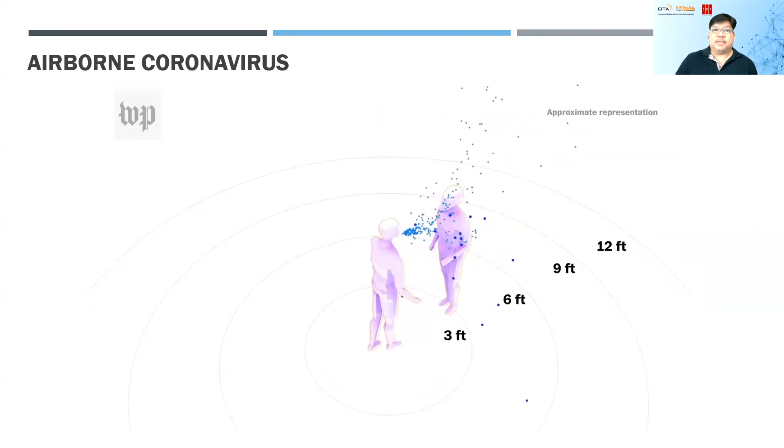A few months ago, the WHO declared the coronavirus as being airborne for a few hours. It can linger in the air for longer than expected times, probably around 6 to 12 to even 24 hours. That means infected persons, even just speaking, can aerosolize the air with coronavirus projectiles. So you can see people just speaking, singing, or coughing — singing aloud may really amplify the projectiles in the air.

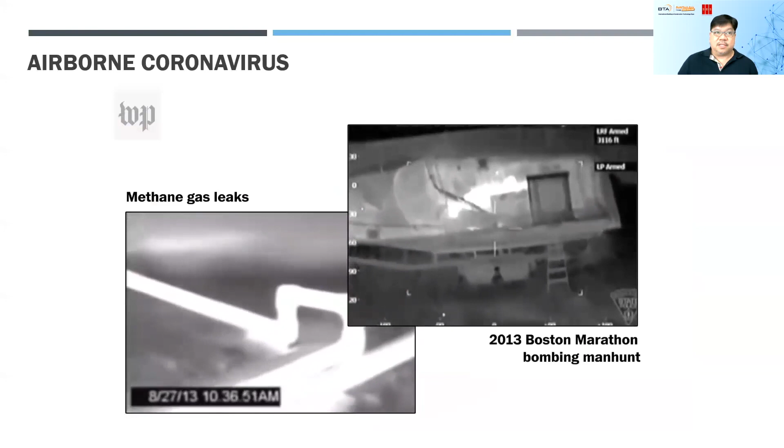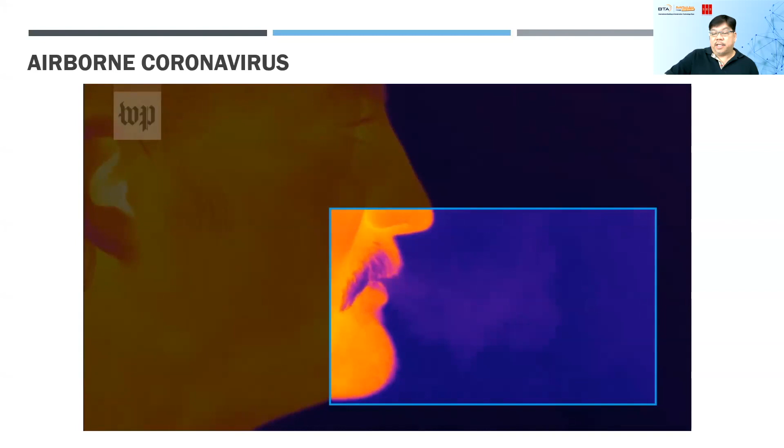This has increased the chances of acquiring COVID through indoor recirculating air. So basically, it has been declared that really the source of transmission of the virus is through indoor air, indoor recirculating air.

Personally, I do not see a future where we will be working from home, as this is not really a sustainable way. Definitely, one way or another, we might need to really get back to the office. So therefore, now that we are aware of the potential threats of airborne pathogens and viruses, we have to be a bit more conscious about the air we breathe.

Indoor air quality matters. We spend 80% of our time indoors, and indoor air is a lot worse inside — it's an environmental risk, and we usually catch illness through indoor air. Particularly in the workplace, it is very important that indoor air is really something that we can look into moving forward to the new normal.

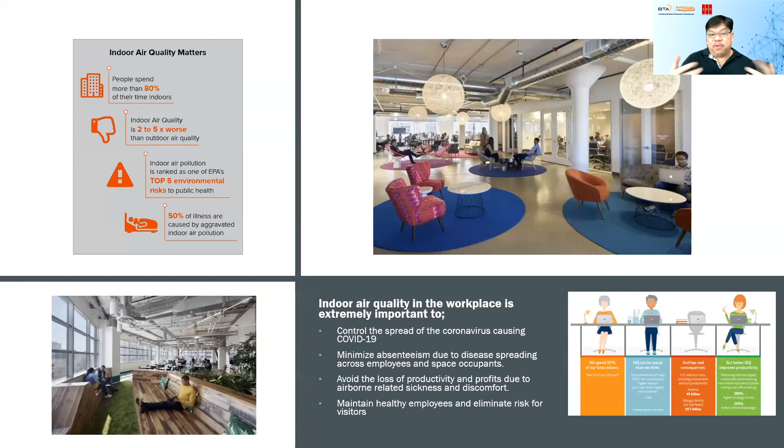Since aerosol tends to go up in the air, and then slowly lingers above, and then slowly goes down, this type of measure might really not be workable. In fact, there are usual ways of maintaining good indoor air quality already through the HVAC system. Adding more frequent fresh air exchange into the indoor space to minimize the spread of pathogens will be a very, very good way already. It's an old way, a traditional way, but ventilation is key to fighting the spread of the virus.

So currently, even companies, even organizations, are already talking about implementing in the near future more indoor air measures to safeguard our indoor environmental quality.

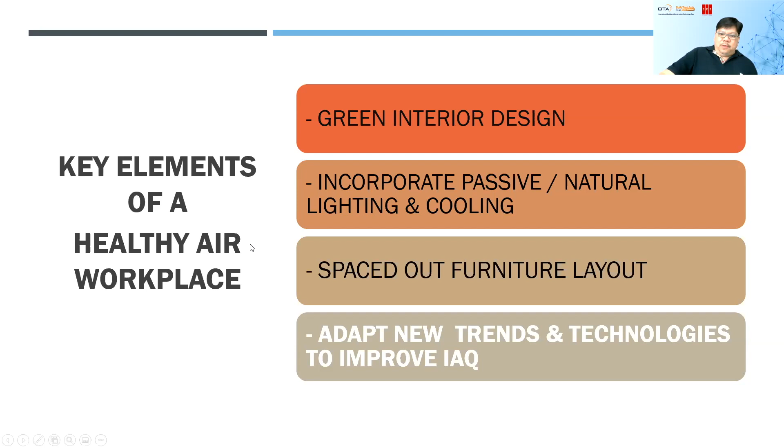So these are just samples of current modern workplaces where they try to at least integrate this type of design, layout, and stuff.

Others put far UV lights. These far UV lights are also not harmful to humans, but it's not yet really proven. So let's not go into that unless there's a very special study confirming that all this far UV or 222 nanometer UV that kills the virus on surfaces is safe.

But you can see they integrate lighting, they integrate spaces, they integrate plants to spruce up the space and also to improve indoor air quality. And then the next one is what I mean by integrating technology.

This is one of our latest solutions to improve indoor air quality, which we presented in one of our competitions in CapitaLand. We call it the Visualize, Monitor, and Control solution. What it does is allow people to see the air they breathe. We make the invisible visible.

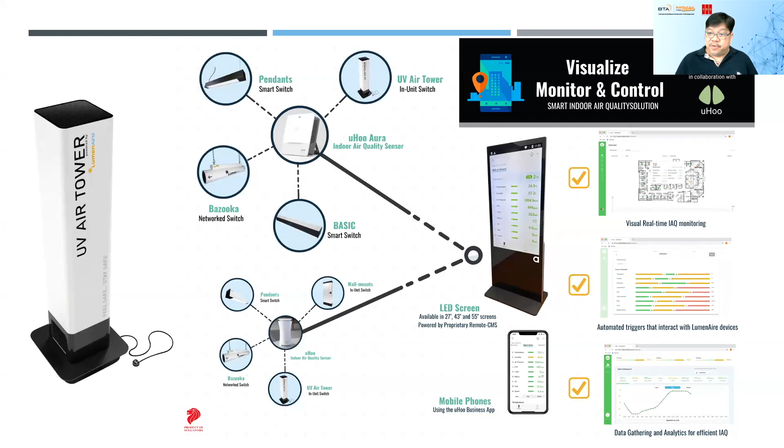So now with the VMC solution, we empower people to see the air they breathe in an occupied space.

The next one is, of course, other technologies like automated natural ventilation systems. These are actuators that automatically open windows, because one key element is fresh air ventilation coming into the space. This can also integrate with our VMC system — if it detects CO2 is high, it can open the windows and fresh air can come in. All of these are cloud-based solutions that work together with the VMC.

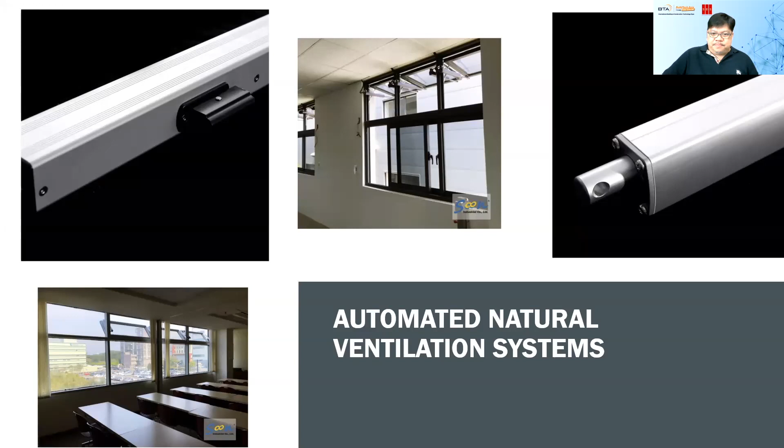Lastly, there are other new technologies about air purification paints, formaldehyde-free finishes, and stuff like that, which bring down the level of bad air, especially after a renovation. This one is called Gush. It's a local company that we also use in some of our offices.

Of course, in replacement for all of those ICI, Nippon, and stuff like that. It's quite good — whenever we do our installation, we also do tests to make sure all of these things work in harmony together.

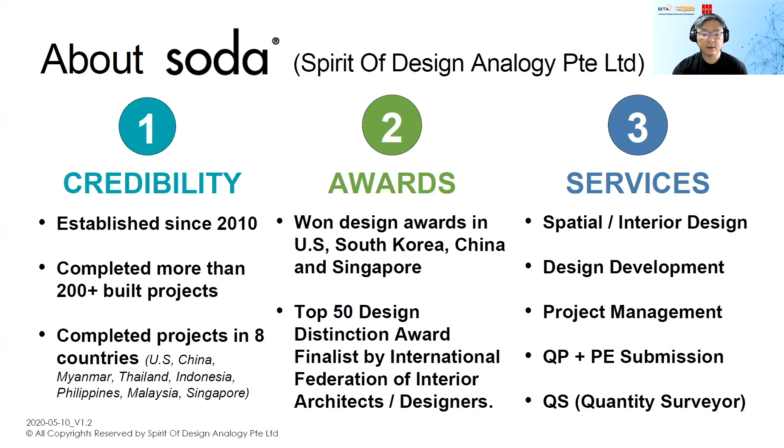So my topic for today is related to F&B design. As we all know, the pandemic has greatly affected the F&B businesses worldwide. According to market research done by Nielsen Corporation last year, there is evidence showing more consumers who will stop dining out and rely on online food delivery. Those who shop online for the first time during the outbreak, in Singapore context like during the circuit breaker, are very likely to do so again in the next 12 months.

So the behavioral patterns across markets has definitely changed. So the big question is, when will it return to normal? The answer may well be never. And therefore, this has become our new normal.

In our research, we summarize 5 key observations on what COVID-19 taught us. Number 1, social distancing becomes habitual. Full dine-in capacity will not recover soon. Therefore, the need for convertible seating areas and new forms of seating arrangement is currently the hot topic in F&B businesses.

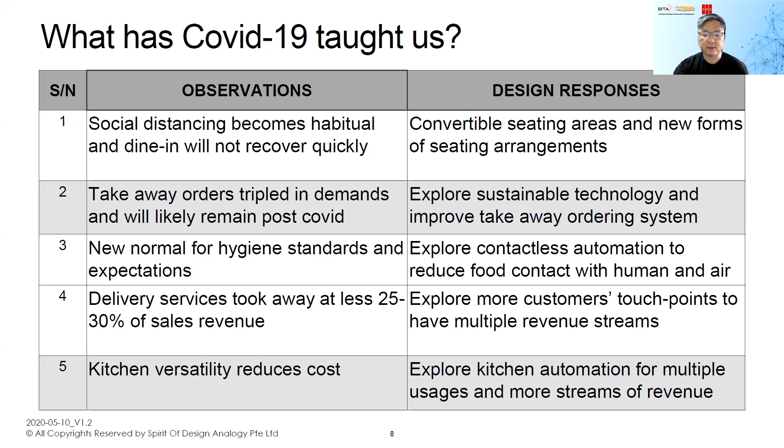So with these design responses, we look at a typical food hall establishment pre-COVID with seating arrangement, or rather the seating area taking up at least 60 to 70% of the total floor space.

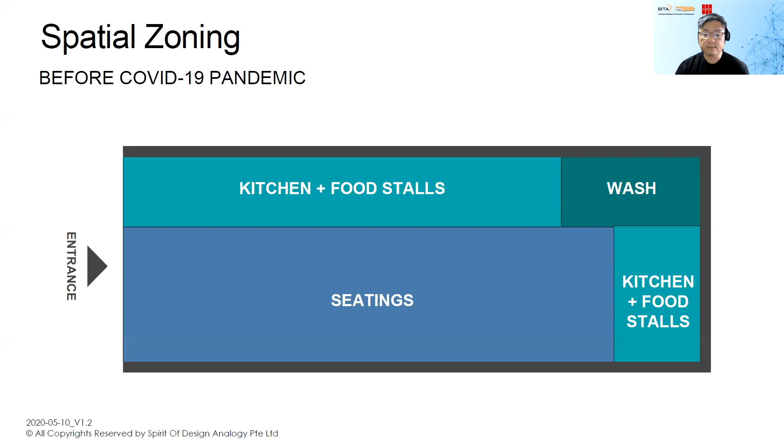The next slide shows how we are assessing the current pandemic scenario, which has converted individual store kitchens into a centralized kitchen where resources, ingredients, manpower can be co-shared for F&B operators. And a dedicated takeout area for delivery riders and drivers to pick up their orders at this designated point instead of allowing them to mingle into other areas.

And we introduce a transfigurable space to tackle the volatile situation of safety measures. As you can see in Singapore context again, we went from 2 per table to 5 per table to 8 per table, and now we are back to 2 per table. So this is a very fluid situation where it requires volatile solutions.

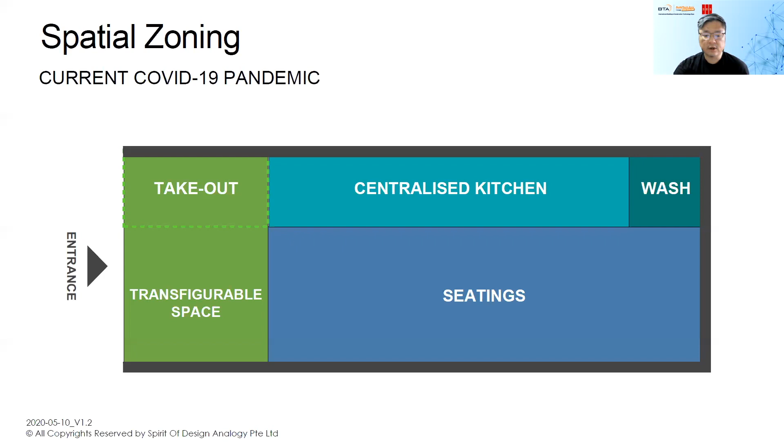And therefore, this transfigurable space can actually be used as a retail component for prepared foodstuffs or additional seating areas where the dining-in regulation relaxes. In a situation where we experience another lockdown and dining-in activity is not allowed, the transfigurable space can be extended to replace seating areas with more retail component or even food lockers that will create other forms of revenue for the F&B operators.

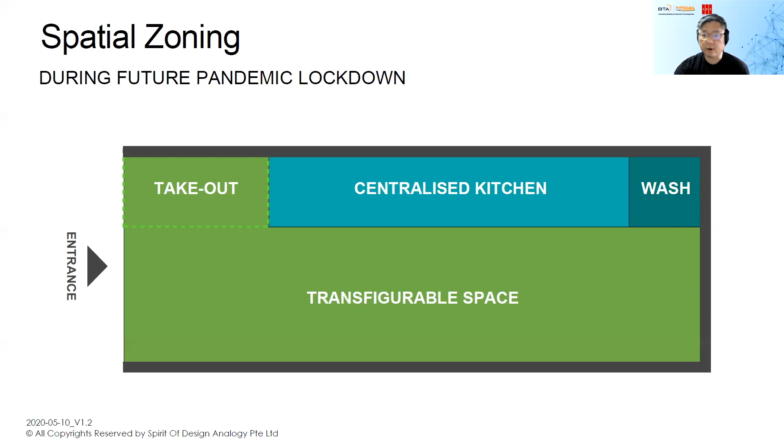With research on how we can integrate technology and automation into the spaces to reduce food coming in contact with human and air, because these are the two key factors that actually transmit the virus. This includes having food lockers for takeouts and automated pickup points for dining in. One of the key design considerations is how this integrated technology complements users and the centralized kitchen concept.

Sustainability is also one of the key components to consider - how we can handle food waste responsibly by planning for a food digester, which can biologically convert solid food waste into gray water or organic fertilizers for additional revenue again. This can actually reduce up to 99% of waste for any F&B operators.

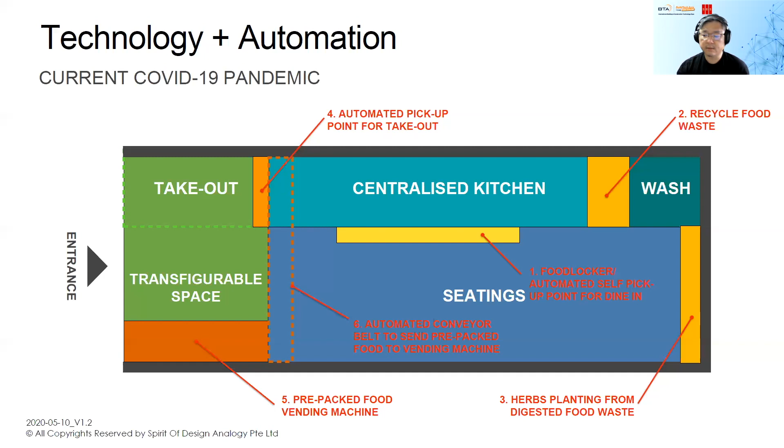Further leveraging on technology and automation, there's a vast ocean of opportunities for how deep tech can pivot an F&B business. On the surface, it can be developed into a secure tracking system to monitor purchasing habits, food wastages, contactless delivery, etc.

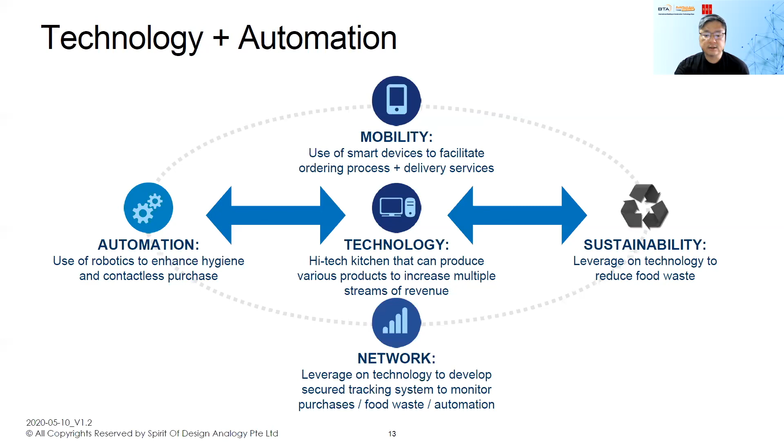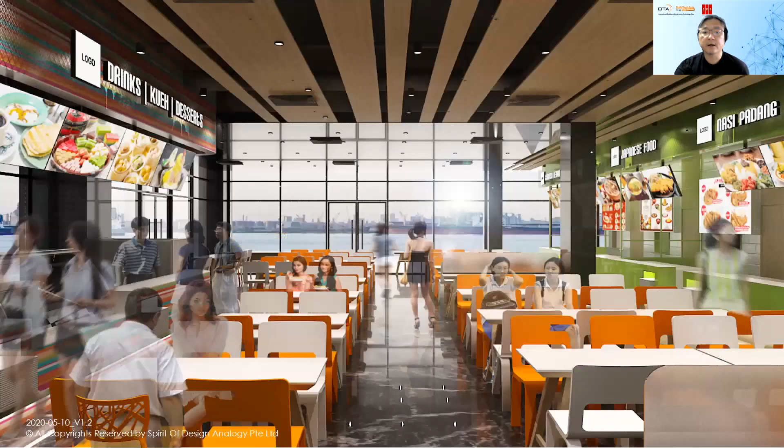So with this, I shall end my presentation. These are just some visuals to show what we are currently working on, like for example the food lockers and how we handle the orderings, new ways of ordering systems, configurable spaces. Yeah, and that's it. Thank you.